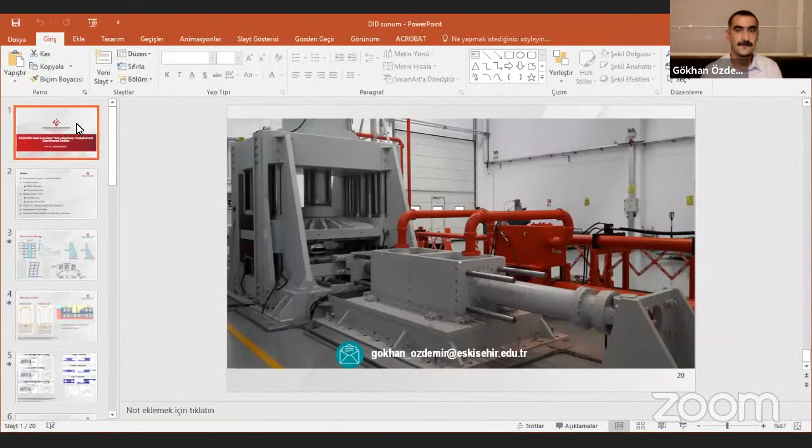As Mr. Özcan introduced, today's topic is the Esquake Seismic Isolator Test Laboratory, and we will be talking about the analytical and experimental studies that we have performed in our facility.

This is the outline of the presentation. For the sake of completeness, I will start with a comparison between a conventional design and a seismically isolated structure design. Then I will briefly touch on seismic isolator types, which are rubber bearings and friction pendulum. The next topic will be isolator tests—why we have performed these tests, and what we have obtained from dynamic tests conducted with these bearings. I will present some results. And then, of course, today's topic is the Esquake Seismic Isolator Test Laboratory.

I would like to introduce the laboratory in a little more detail, and then give some representative test videos that we performed in our laboratory for projects, especially hospital projects in our country. And finally, very briefly, I will give some notion about the analytical tools that can be used to idealize the actual hysteretic representation for the isolators.

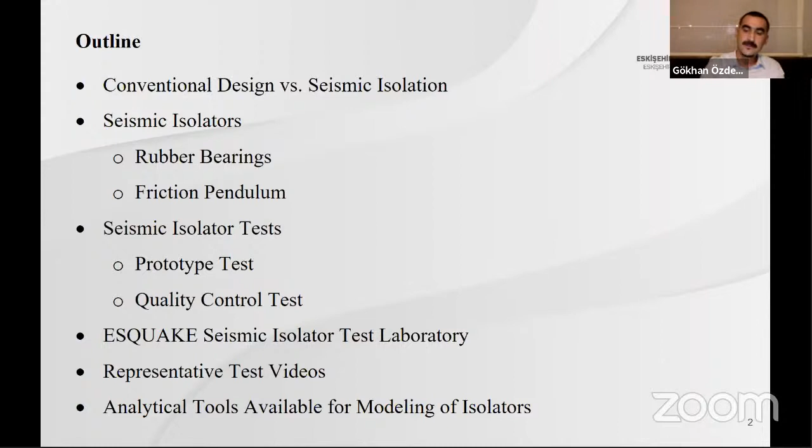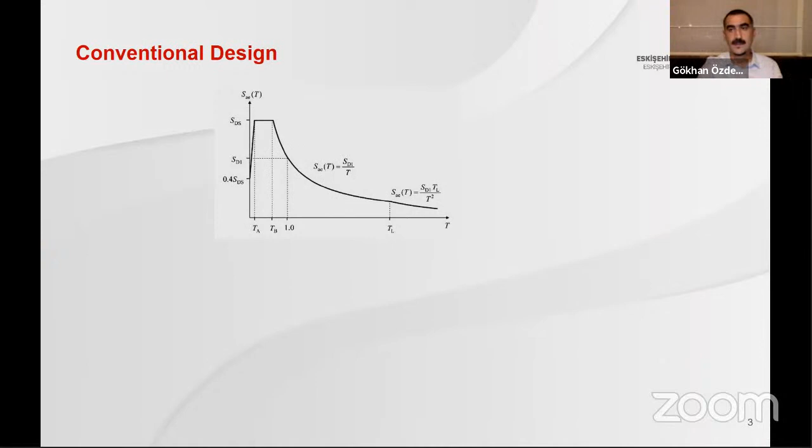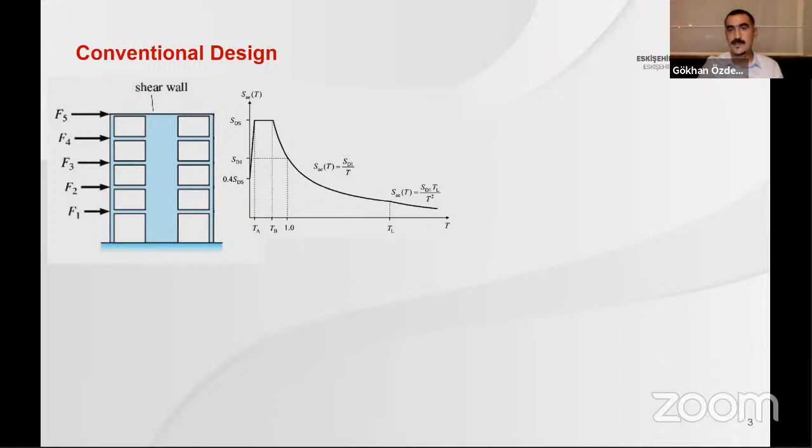So let me first start with a conventional design. What we do in a design is to start with a design spectrum, and based on this spectrum, we compute the earthquake forces that will act on the structure. Once you determine the earthquake force and apply it to the floor levels, based on these external forces, we try to analyze the structure and get the internal forces, such as the shear force and moment diagram, that will be used to design the frame members.

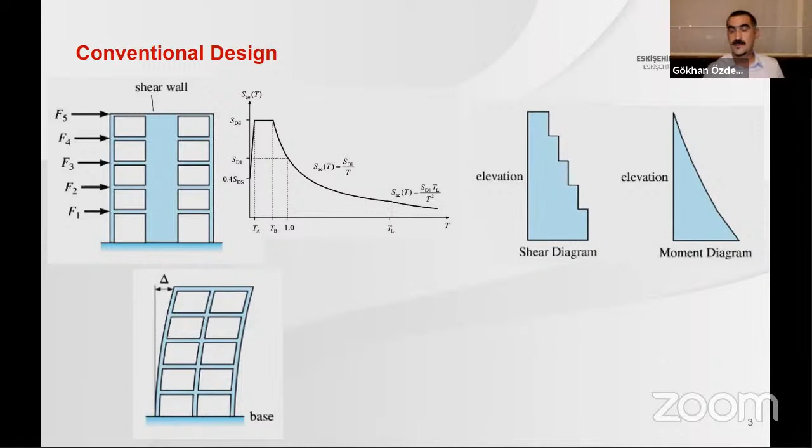When we say design, we should understand the dimensioning of the structural frame members. And of course, we should keep in mind that not only the internal forces, but also the deflection or deformation of the frame has to be considered in the design. It can be drift ratio or top floor displacement. We control the displacement or deformation of the frame member, and based on this, we can compare the results or conduct a performance-based design for the structure.

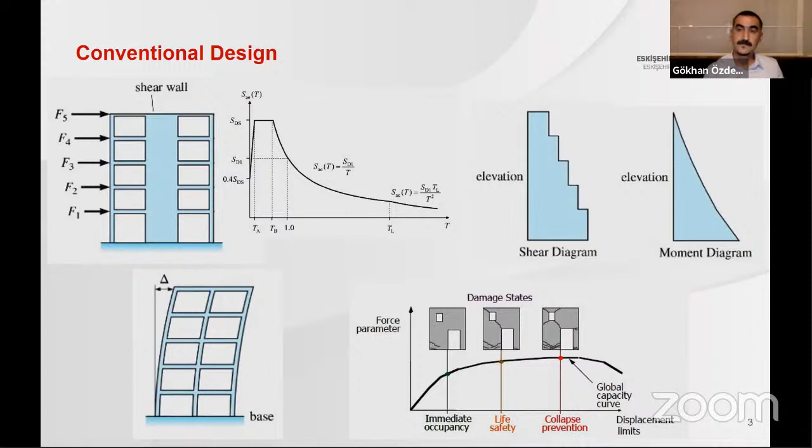As we can understand from this figure, in a conventional design, we are familiar with deformation in the structure. So it will not be elastic, and there will be damage in the structure. The level of damage is based on the designer—it can be life safety or collapse prevention—but anyways, there will be damage in the structure.

But if you consider seismic isolation, the difference is that in a conventional design structure, we expect damage in the superstructure, and the damage is due to the relative motion or relative deformation between story levels. On the other hand, in a seismically isolated structure, the deformation or non-linearity is solely focused on just one level, and that level is the seismic isolation level.

This means the energy dissipation is performed by the isolators, and the superstructure will move like a rigid body, so there won't be any relative deformation between story levels, meaning there won't be any damage in the superstructure. It behaves linearly. So apart from the conventional design structure, there won't be any damage in the superstructure, and we can keep it in use, as its functionality will be preserved even after a super big earthquake, which is called the maximum considered earthquake.

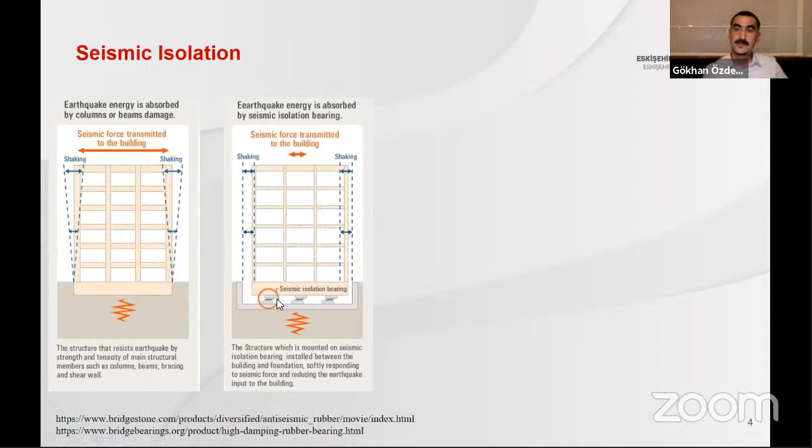In the design of seismically isolated structures, at the bottom of the superstructure we have structural members called seismic isolators, shown by a circle at the base. What an isolator provides is that during shaking of the ground, instead of the superstructure, just the isolators will deform, because they have high flexibility compared to the frame members. So the deformation or motion takes place at this level, and the energy dissipation is due to the hysteretic behavior of the isolators.

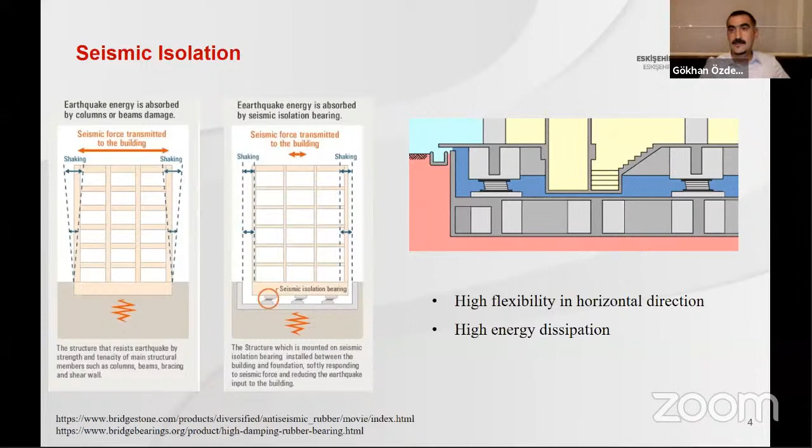We basically have two types of isolators: one is rubber-based, and the other is friction-based, or sliders.

In this figure, on the top left, we have a rubber bearing denoted as the low damping rubber bearing. It is composed of alternate layers of rubber and steel through the height of the bearing. The rubber is essentially responsible for the isolation period or the flexibility of the bearing, whereas the steel shims or steel plates provide a large or high vertical stiffness. A low damping rubber bearing provides almost elastic behavior, and in this case the needed high energy dissipation or effective damping ratio will not be enough in case of large seismicity.

On the other hand, the primitive version of a friction pendulum is the single pendulum, meaning there is only one surface designed to deform during an earthquake. This kind of bearing updated with time, and the updated versions can be a lead rubber bearing and a double pendulum.

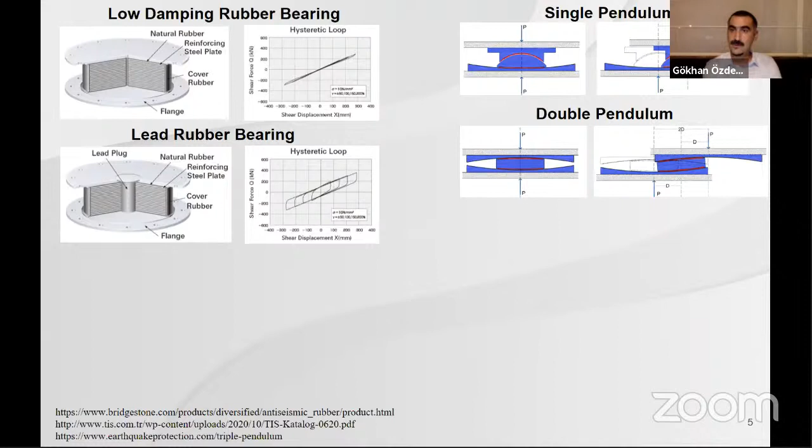In a lead rubber bearing, since the design requires larger dissipated energy or hysteretic dissipation, we put a lead plug inside the bearing through the center line, and that lead plug provides additional hysteretic energy dissipation. This means what we expect from a seismically isolated structure is about 30% effective damping during a maximum considered earthquake. So apart from the low damping one, here you can easily obtain a large hysteretic curve, a large area, which means a large energy dissipation capacity.

On the other hand, in a double friction pendulum, the update from the single pendulum is not due to the hysteretic behavior, but to reduce the dimension of the isolator. Here there are two surfaces that act through the cyclic motion, meaning the same displacement capacity is provided by a much smaller isolator, about half the dimension of a single pendulum. This provides a very economical design for the same amplitude of motion.

Further improvements in these bearings are the high damping rubber bearing and the triple friction pendulum. In a high damping rubber bearing, we don't need a lead core plug through the height of the isolator; instead you can improve the chemical mixture of the rubber so that you have very similar hysteretic behavior or energy dissipation capacity to that of the lead rubber bearing.

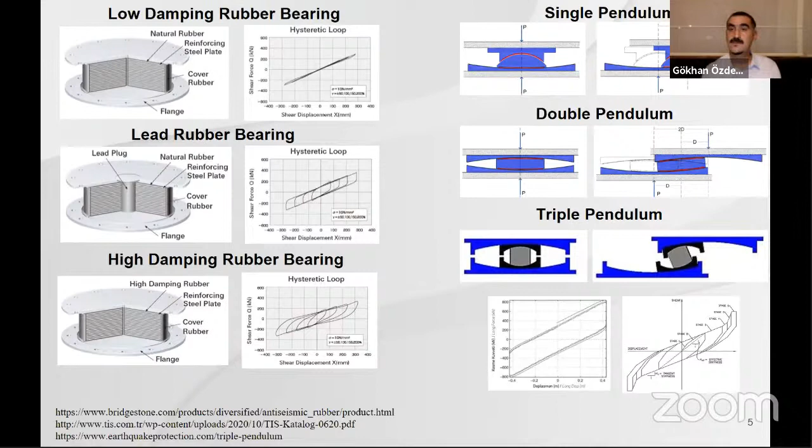Nowadays we have very large structures constructed with seismic isolation, which is why we have demanding capacities for these tests. So what kind of isolator test needs to be performed will be the next question.

Basically there are two categories: the prototype test, and the quality control or production control tests. In a prototype test, we perform these to check whether the manufactured bearing sustains the appropriate characteristics and is in accordance with the design properties.

In such tests we have to consider three different parameters. One is the effect of displacement, related to seismicity level, and the other is the effect of frequency - the loading speed is investigated, and the response modification due to that frequency is denoted.

Then the effect of vertical force is noted during cyclic motion, because in a ground motion, in addition to the two horizontal components, we also have the vertical one, and depending on its significance, there can be variation in the axial forces acting on the isolator.

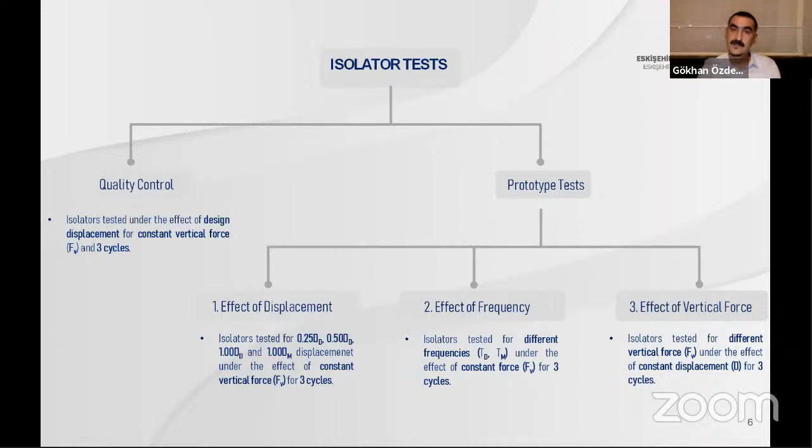After that introduction, it is time to talk about the isolator tests. A few years ago, we initiated construction due to seismically isolated hospital buildings in Turkey.

Even though we had very large projects, we didn't have any facility in Turkey capable of performing both the production control and the prototype testings.

Instead, we had to demandingly ask for facilities around worldwide countries, let's say United States of America, Italy, China, Taiwan, and so on.

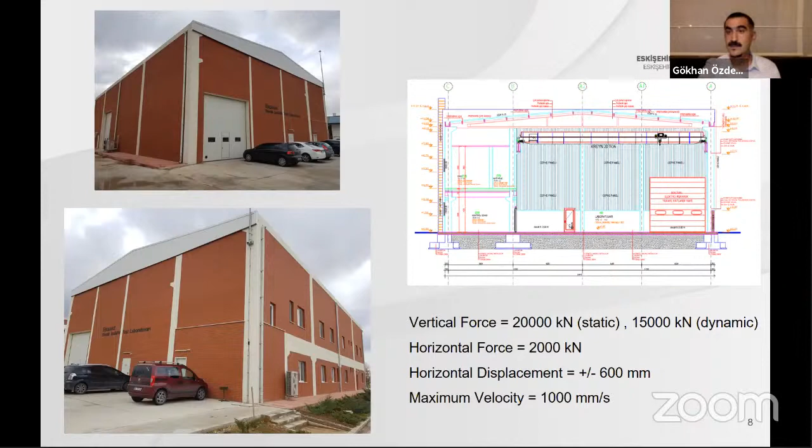Once I inform about the capacity of the laboratory, the next step will be the test rig. Here we have pictures from all angles of the laboratory, from sides, from top, in order to introduce it very well for the audience.

And we have two pistons, dynamic pistons, in both horizontal and vertical directions. In the vertical direction, we simulate the weight of the superstructure or the force transferred to the isolator through the columns and beams. The horizontal piston, or actuator, is used to apply the cyclic motion that idealizes the motion during an earthquake. And of course, we have a very large amount of energy or capacity to apply that much loading.

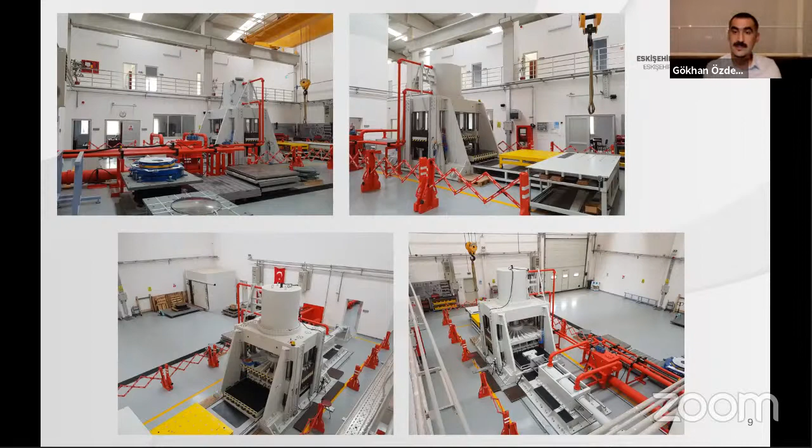And to do that, we have these accumulator sets, which are used to apply energy for transferring the oil from one side to the servo-controlled actuators to apply the needed motion.

What I especially would like to talk about is that we also have an air-conditioned room within the facility, and that room can drop the temperature down to minus 40 degrees Celsius, with a maximum temperature of 50 degrees Celsius, so that we can perform very demanding tests. Based on this capacity, we can apply loading at different environmental conditions.

Another point is that we have a meeting room in the laboratory, because all of these tests are performed during visits from the designer, the constructor, the manufacturer, whoever. All these people are present during the tests. Another point I have to say is that due to COVID-19 nowadays, we cannot accept anyone to visit our laboratory.

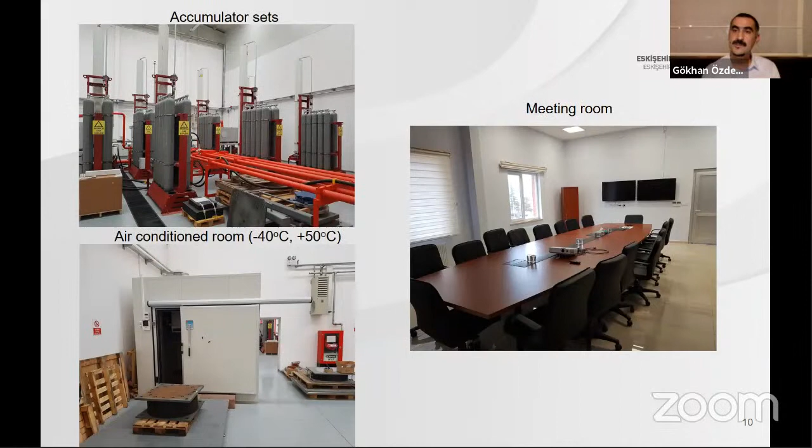The next will be the introduction of the personnel quality, or the staff we use to perform these tests. As a director, myself will be here, and also we have technical staff and engineering staff.

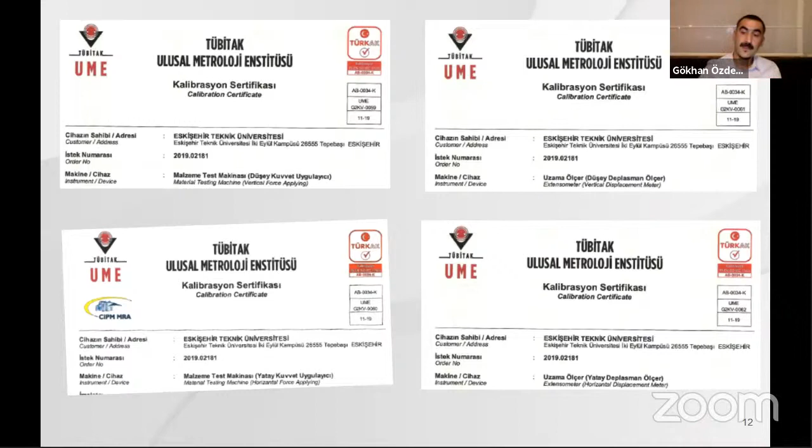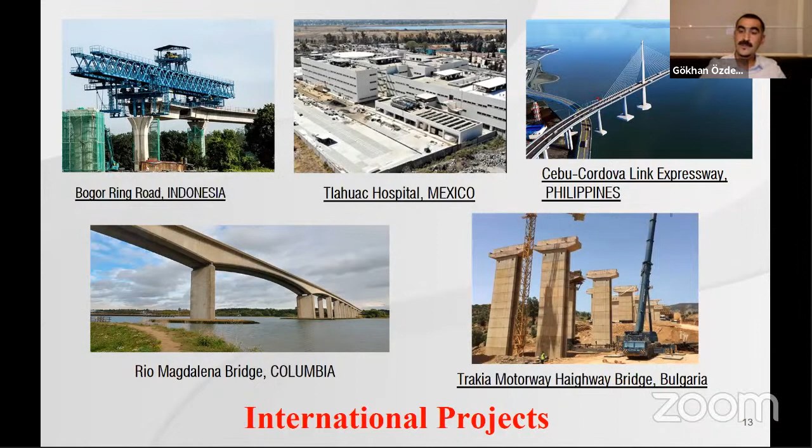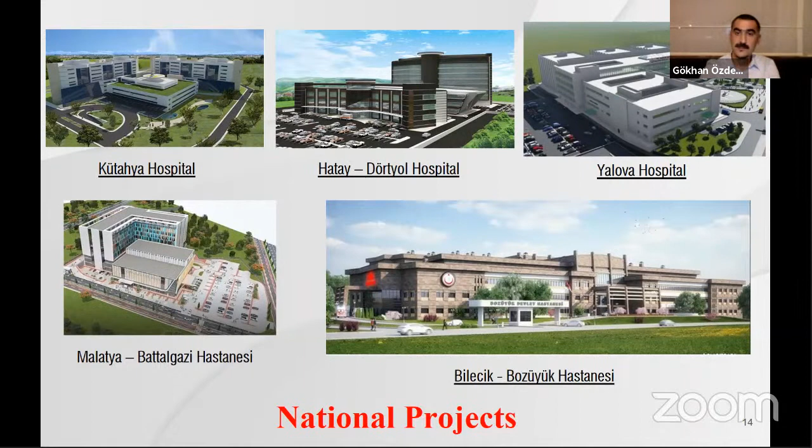Some national projects are also here. These are examples, mostly hospital projects: Kütahya Hospital, Hatay Dörtyol Hospital, Yalova, Malatya, Bilecik, and it goes on. There are also some future projects to be tested in our laboratory, such as the Bartın project and the Adıyaman project, which we will test very soon. So these are the national projects we are involved in.

Let me show you some videos from the tests we have performed in the laboratory. This one was used in an international project also. It is a double friction pendulum, articulated type, and it is tested under a displacement of 200 millimeters with a frequency of almost 0.16 hertz. The vertical force acting on this isolator is 5,000 kilonewtons.

Okay, now I will show another one. This is from a national project, and it is one of the biggest displacement capacities we have tested in the laboratory. Here it is 400 millimeters plus and minus, and the frequency is 0.29 with a maximum velocity of about 720 millimeters per second. The vertical force acting on this bearing was 10,000 kilonewtons.

Another one here. This one is actually important because in a prototype testing, we have to perform different kinds of loadings. This one has 10 continuous cycles of loading, which is demanding and requires very large hydraulic power. It is 10 continuous cycles with 180 millimeters at a frequency of almost 0.4 hertz, and the vertical force was 3,200 kilonewtons.

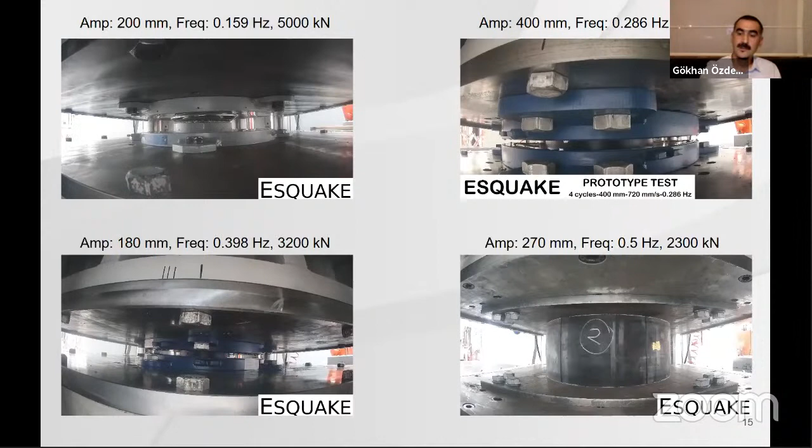Once you perform the loading, what you have is the report. This is important for the designers, and what is written in the report is meant to point out to the designer the design values of this isolator. For instance, in this isolator test report, you have the number of cycles, the amplitude, the frequency, and the vertical force.

This picture provides the resultant hysteretic behavior obtained from the test result. For each cycle of the motion, in this case specifically we have 3 cycles. So for each cycle we have to present the corresponding force-displacement curve so that the designer can judge whether the variation from cycle to cycle is appropriate or not.

That judgment will be based on the evaluation of the post-yield stiffness, denoted by Kp in this slide, and the effective stiffness, represented by the blue dashed line in the graphs, and of course the effective damping of the isolators. Since it is a friction pendulum, we have to provide also the effective friction coefficient.

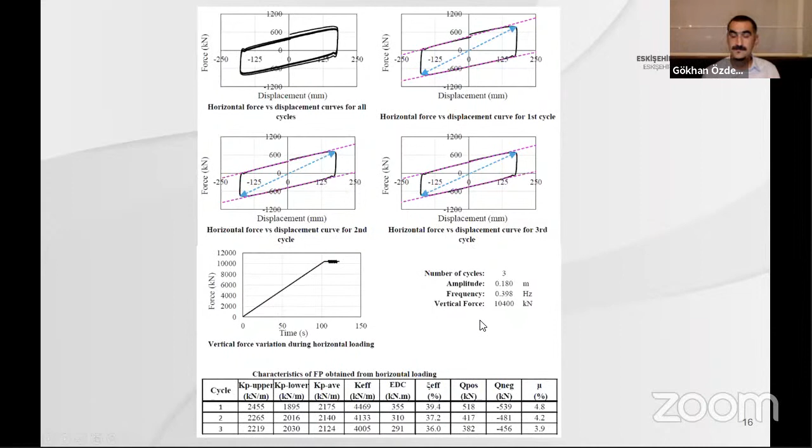Once I'm done here with the test results and loading protocols, I have to say that we have a superior capacity for testing isolators. For instance, I have shown you the environmental or air-conditioned room we have, and using that room, we have performed some tests also with the lead rubber bearing especially.

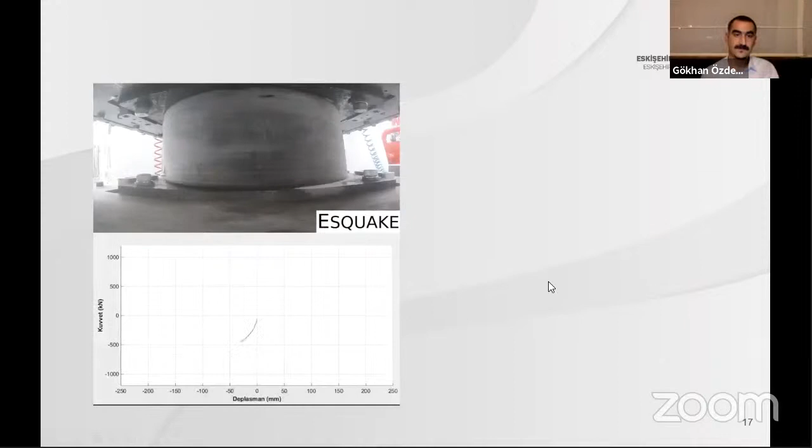This video will show you the force-displacement results recorded after the horizontal loading. This is important because we kept this bearing at minus 30 degrees Celsius for 24 hours, and the manufacturer asked us to compare the results with room temperature. Let me show you the force-displacement curve obtained from the tests of this LRB. By the way, these white points are actually ice, since it was kept at minus 30 degrees Celsius for 24 hours and then tested in the setup.

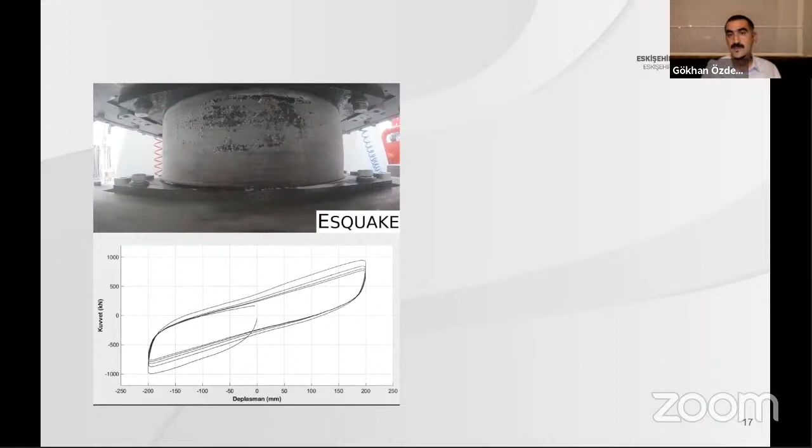What is the difference between them? If this test is performed in laboratory conditions, which is actually 23 degrees Celsius, and compared with the one obtained at minus 30 degrees Celsius, you can easily see the difference from this graph. So the characteristic strength of the isolator, and also the post-yield stiffness, which is used to compute the isolation period, are totally different from each other.

In design, what we engineers do is perform a bounding analysis, namely the lower bound and upper bound analysis. They are based on characteristics modified to represent the most disadvantageous cases. For instance, the lower bound analysis is used to estimate the maximum isolator displacement, whereas the upper bound characteristics are used to estimate the maximum shear force transferred to the superstructure.

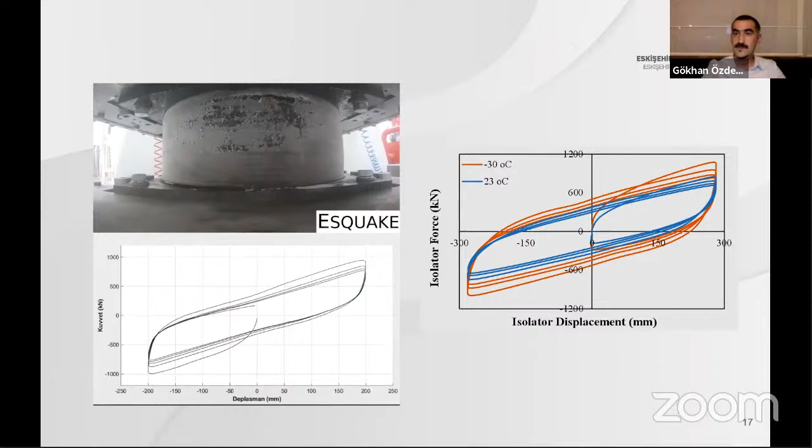This is important because we can also perform such tests, and it is part of a research program conducted in our laboratory. This is actually the most advantageous part of our facility. We can perform not only cyclic loads, but also some climatic effects will also be considered in the laboratory.

Okay, finally I will talk about some analytical part of the research conducted in our laboratory. We can perform not only the isolator tests, but also we are capable of modeling these isolators by using some analytical tools.

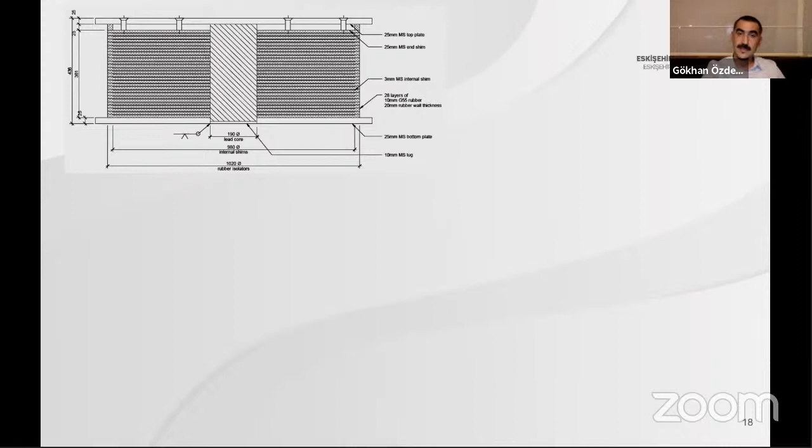For instance, here the drawing of a large size bearing is given in the picture. It is almost 1 meter in diameter and has a lead core with a diameter of 190 millimeters. And when it is subjected to a cyclic motion given in the picture, it has 0.1 hertz frequency, and the magnitude of the amplitude of the motion is 280 millimeters.

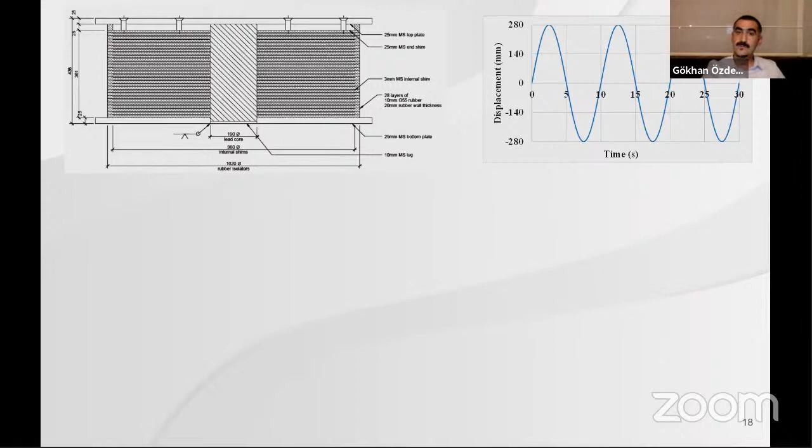Obtain the actual behavior, it is not easy to consider the variation from the hysteretic force displacement curve, because the code requirements imply that the bounding analysis will be used by considering a non-deteriorating isolator force deformation curve. But in this case, which is obtained from the actual response or actual test results, it tells us that the bearing, especially the lead rubber bearing, undergoes a deterioration in strength from cycle to cycle.

And to do that in an analytical model, it is nowadays available in OpenSees. You can analytically obtain the real behavior of the isolators.

And the basic reason for the deterioration in strength of these isolators is the temperature rise in the lead core. And that temperature rise is used to define the yield strength of lead through the cyclic motion. So you have an initial strength, which is then modified due to the temperature rise recorded in the lead core.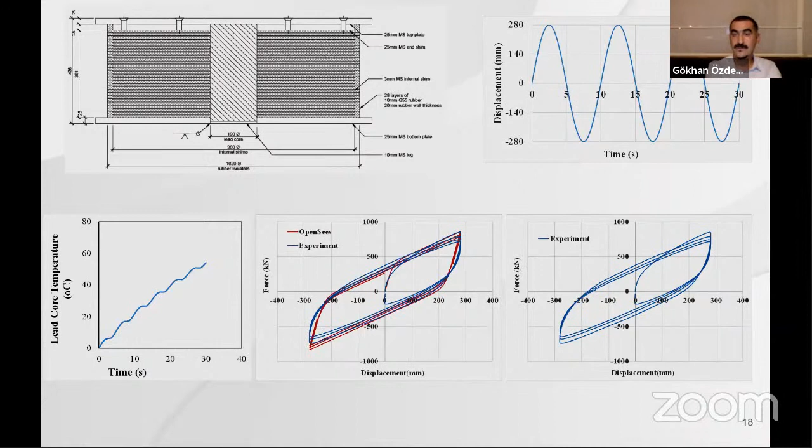And that temperature rise for the specific motion can be up to 60 degrees Celsius, which means almost 30% of the initial strength will be reduced, and the isolator will provide different characteristic strength and also different stiffness, meaning the energy dissipation properties will not be constant through the motion, but will also differ from cycle to cycle.

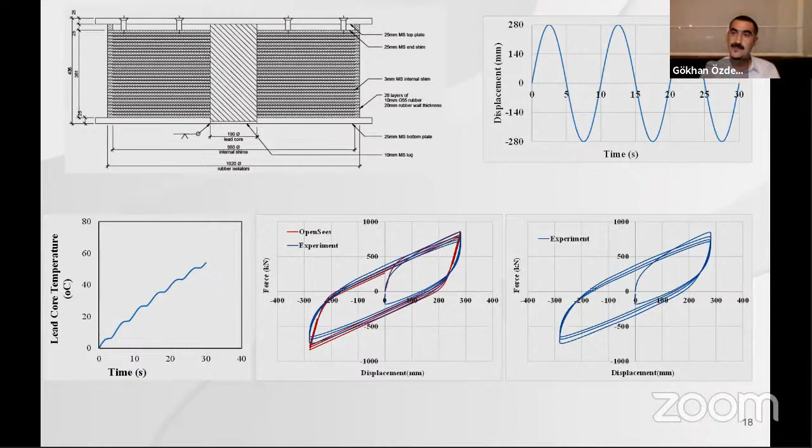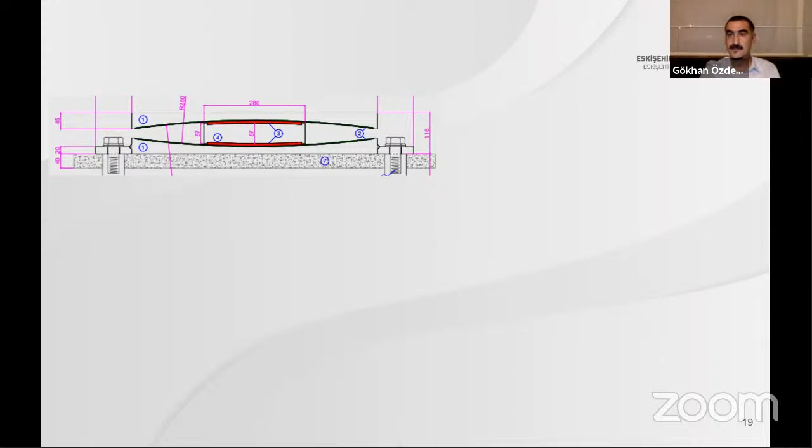Okay, this is the case for the lead rubber bearing. What about a friction pendulum? This can also be analytically modeled, and the hysteretic response can be obtained accurately.

For instance, again, we assume a motion with an amplitude of 450 millimeters, which is tested in our laboratory, and the corresponding force displacement curve is obtained as shown here. Here, again, as you realize, the force displacement curve deteriorates from cycle to cycle.

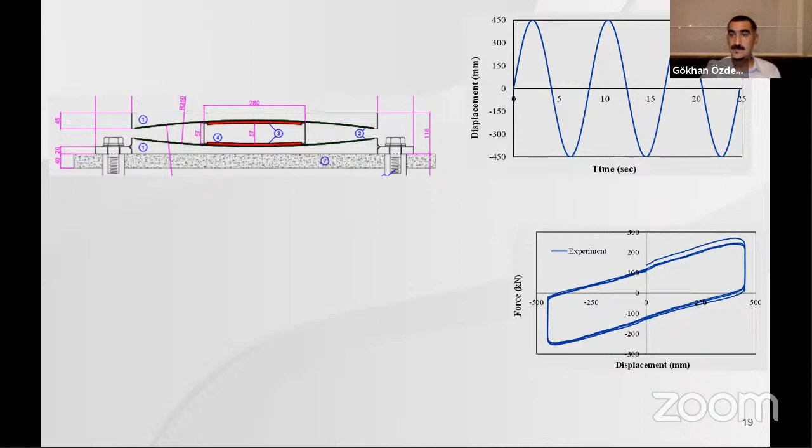This is basically the temperature rise, this time for the friction surface. When the friction material and the steel base move back and forth, there has to be energy dissipation. And that energy dissipation is due to the temperature rise, and that temperature rise will again be used to model and reduce the friction coefficient.

And if you can do this, what you will have is something like this. As you see, again, we use the analytical tool incorporated into OpenSees, which is an open source structural analysis program. You can perform this analytical representation.

And again, you have to be able to consider the change in the friction coefficient. Okay, if you do not consider any change or any deterioration in strength or friction, what you have is this, the red dashed line, the no heating case. The friction coefficient is constant through the motion.

But if you consider the heating problem, or the heating in the friction surface, then you can talk about the reduction in friction coefficient. I show these two cases because we are capable of not only performing tests, but also we are very strong in performing analytical performance studies of the structure when it is seismically isolated by either friction pendulum or lead rubber bearing.

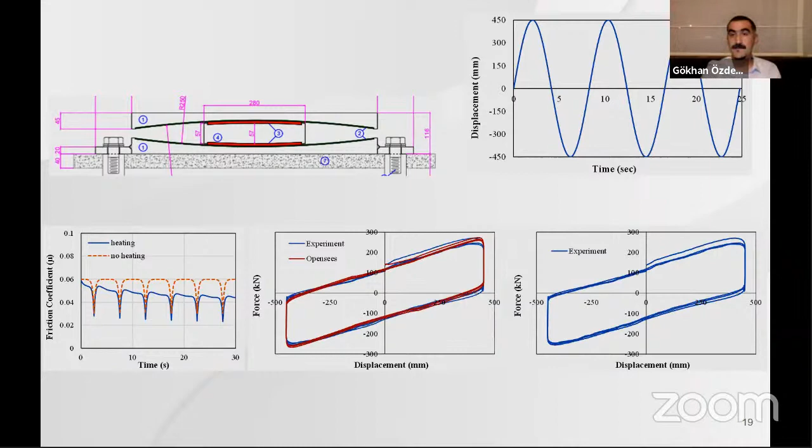And I think this is the final slide I will introduce, and that concludes my presentation today. I think it is time. I will not, as planned, continue further; I have talked about the laboratory and the analytical investigations within one hour.